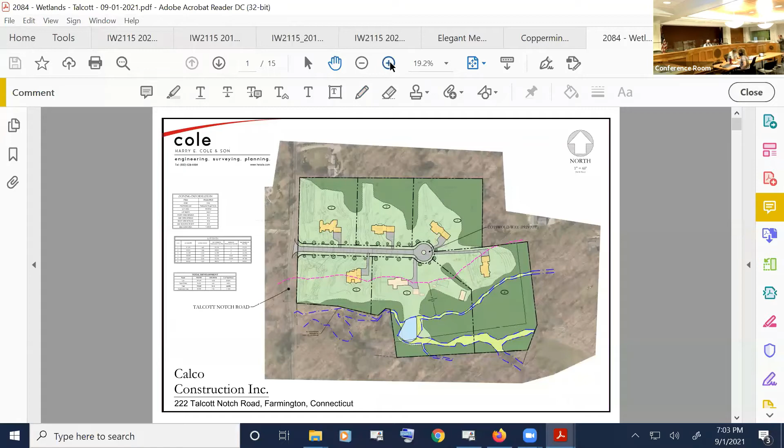Good evening, members of the commission. For the record, Brian Panico, Harry Cole and Son, 876 South Main Street in Plantsville. Here on behalf of the applicant, Calco Construction. The owner of this property at 222 Talcott Notch Road is John Sinise. He's also here. This is a residential R80 subdivision.

Total area of the parcels is 16.18 acres. It's currently one lot with a single family home. There's some outbuildings and a pool as well. Those you can see are on this presentation drawing on lot number 5, the lot in the middle on the south.

This lot is served by private well and septic system, surrounded by residential properties to the south, the east, and the north, with Talcott Notch Road to the west. The wetlands run along what the soil scientist has identified as an intermittent channel, so that's not necessarily a stream with constantly running water. It's intermittent seasonally, depending on rainfall. You can also see there on the south, behind the existing house, is a pond.

That pond was created, it's dammed. So the wetlands follow along that intermittent channel to the south of the house on lot 5, through to a larger wetland pocket after the pond, which runs off the site. There's approximately 0.76 acres of wetlands on this site and approximately 2 acres of upland review area, pretty much through the backs. You can see the upland review area on that presentation drawing, highlighted by that purple line, and the wetlands are outlined in blue with that lighter green color running inside of it.

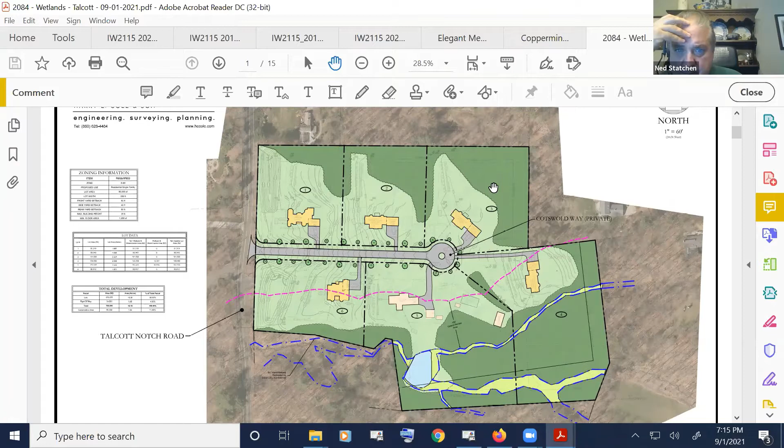Okay, and I can't quite read the plans. What are some of the other buildings that are on that property? There's a couple of sheds, a pool house type of thing, there's a small cabin, and I believe that's it.

So the building all the way to the right of the screen there, to the east, I believe that's a cabin. And then there's a garage directly off of the driveway and a couple of smaller sheds. The box that's not filled in with a color is the pool. Okay.

All right, and then I don't know if you can answer this, but on item G they talk about construction sequencing. Do we know if all these houses are going to be built at the same time, or are we going to be staggering them, build and sell, or some combination thereof?

So you plan on building the road all at once? So there'll be custom homes, they'll be built kind of on a per sale basis. The road, I would imagine, is getting roughed in all at once, in one shot, and then build all the houses. Once everything's finally built, then do the final course of pavement and stuff like that. But the houses will be built slowly.

And I know that's come up with staff comments in the past on some of these things, so as they're doing this, clear a couple lots at a time as you're ready to build, and not cut the entire site all at once. So it'll be more staged, kind of sequenced.

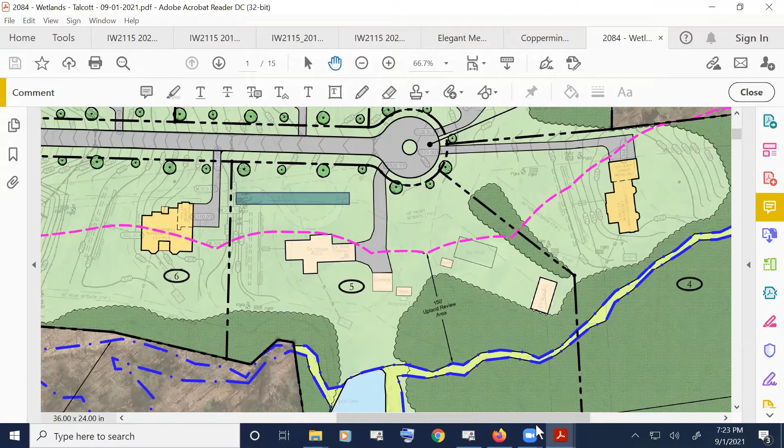I agree, and if the applicant could work with Shannon, in addition to the staking of lot 4, some other major features like the center line of the road or some of the lot corners would be helpful, but Shannon will be able to advise. Thank you. That's good. So I think we've addressed the issues that we need to deal with this evening. Okay, perfect. Thank you very much. Thank you for coming in and giving the information.

All right. We're so efficient.

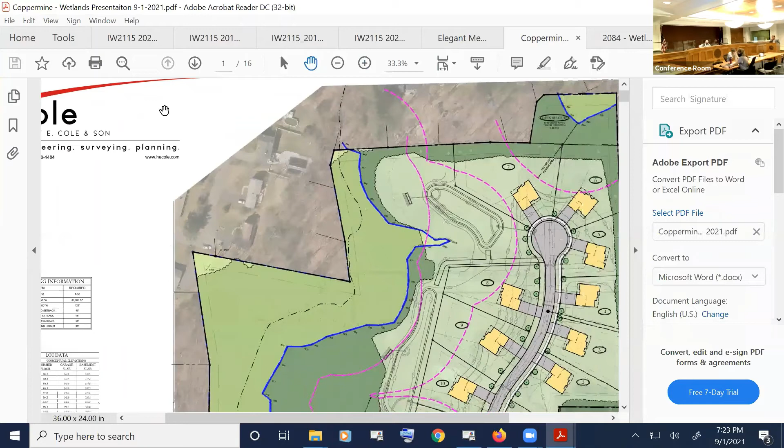So next up on the agenda is Calco, 168 Coppermine Road. Correct.

All right, so say my name for the record again. For the record, Brian Panico, Harry Cole and Son, 876 South Main Street in Plantsville. Here on behalf of the applicant, Calco Construction, Inc. The owner of this property is The Gardens LLC.

So the current property is an R30 residential. Total area of the parcel is 14.39 acres. It's one single family house. There was a barn, outbuildings, driveway off of Coppermine Road. Surrounded by residential properties to the east, west, and north. South is Coppermine Road.

Currently, the site slopes from east to west. The parcel is roughly wooded through almost half of it. The eastern half has got a large open cleared area. The western half is relatively wooded. That's the area of the wetlands.

There are approximately 4 acres of wetlands on the site, and 2.35 acres of upland review area. Just like in the previous presentation drawing, the wetlands are outlined with the darker blue line, and that green area is wetlands on the inside. The purple lines are upland review.

By splitting it into the two detention basin areas, we were also able to reduce the amount of tree clearing, so we have just a small portion through the middle of the site that's actually being cleared. This is an overlay showing the lot layout and where it's cleared versus not, from an aerial perspective. You can see where the tree line comes along on the inside, and then bumps out where that second detention basin to the north is.

That's really the only area where we're clearing trees within the upland review. Then at the end of the cul-de-sac we have 2 more lots, and we're clearing some trees on those as well. So effectively, the areas we're now using for detention aren't taking away nearly as much tree cover or canopy, which was directly one of the main concerns in the last application.

We all have reduced the wetland buffer impacts. The previous application, I believe, had almost 3 acres or so of upland review area impact. We've actually dropped that down to 2 acres. And the impacts that we have are clearing and grading, primarily grading for the detention basins, the house on lot 11, and then the rear yards on lots 8, 9, and 10.

So as you look at this map, you can see where the existing house is and where the proposed house is on that lot 11. They're virtually almost in the same place. Actually, the house we're proposing is slightly further away, so the impact there is very minimal as well.

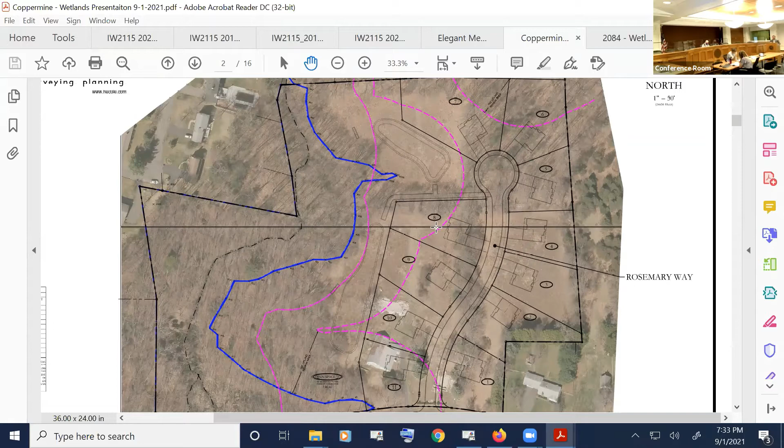So we haven't proposed any conservation easements. We are proposing that all of the wetlands and a good chunk of that upland review area is just placed into conservation as open space—so all the area that's outside of those lots. Shannon, if you want to jump back up to that other slide, it might be a little more clear there. So both of the detention basins, all of that is in open space.

Behind lots—I believe that's 6 and 7—is open space. So is this road going to be a private road, and who would be responsible for maintaining the detention ponds? This would be proposed as a public road, and either the town-owned open space or I think normally the town would maintain those. We do have a little access road and access to the open space between the two lots there and that northern detention basin, so there is easy and adequate access. Those detention basins are also very shallow and should be relatively easy to maintain for the town as well.

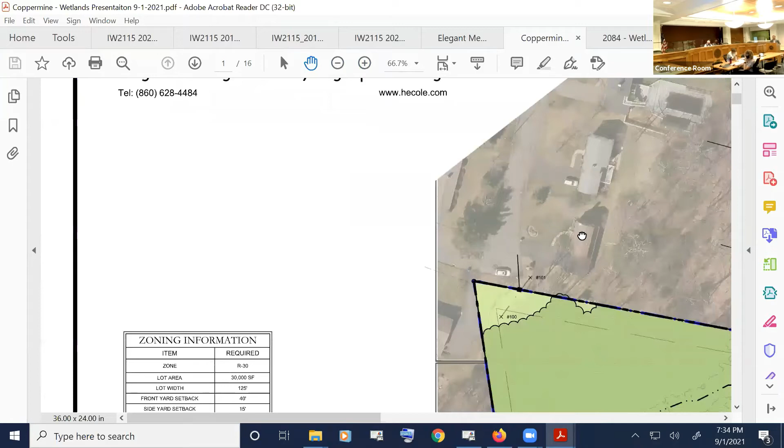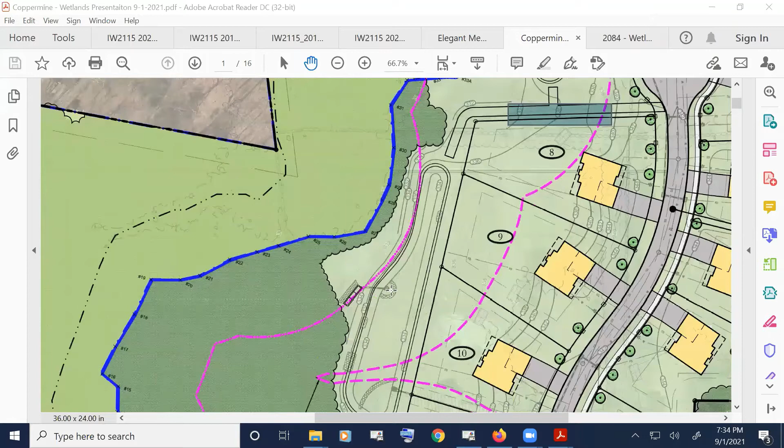Okay, so I see the northern basin has an outlet structure, a drainage outlet structure into it. Is the other basin just accepting overland flow? So both basins—oh, I see it, yes—both basins collect water from the road, from either side of the high point basically in the road. And then both basins have a discharge, which is an infiltration level spreader type of discharge structure. What that does is it's basically structures that are halfway or three-quarters of the way into the ground.

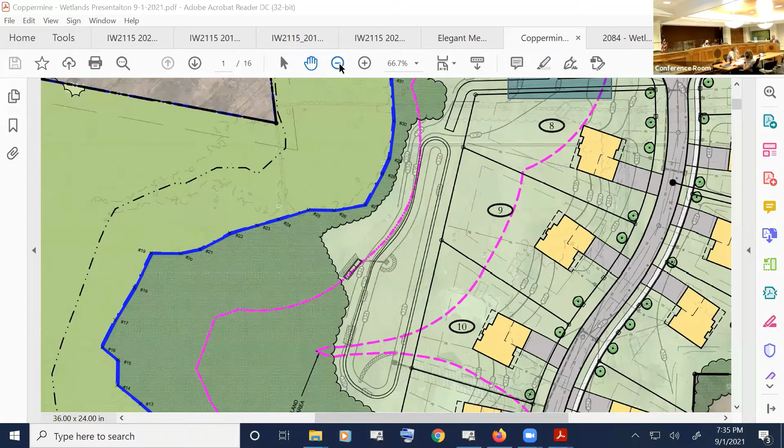Those structures take the water as it comes out of the basin, allowing them to fill up and slowly either infiltrate the water into the ground, or during large storm events, overflow out of the top orifices into riprap and spread evenly into the wetlands. Groundwater recharge was a big concern in the previous application, so these structures are an effort to better allow for infiltration and groundwater recharge. All of the roofs on every house will have infiltration chambers, providing more groundwater recharge. The fear was that adding all these buildings and foundations could slow down groundwater flow through the site and take water out of the wetland. So we wanted to make sure we're recharging and adding as much water back to that wetland as possible, while still being responsible about the amount of water allowed to flow.

Is there an easement proposed to get access to that storm drainage outlet south of the linear detention pond? On the inlet pipe, right there. How are you going to get access to that to maintain it? I believe there is an easement over that lot in the side yards of each of those two lots for maintenance and access. And the existing house, what's the disposition of that? The existing house, barns, and all the structures on the site—some are already removed and the rest will be removed.

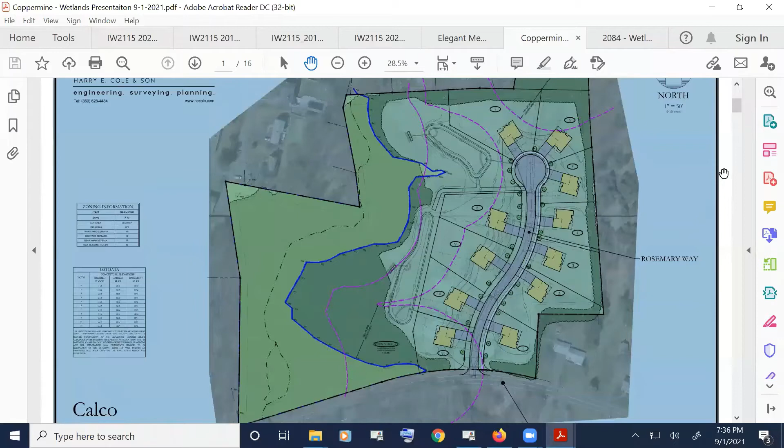Thank you, that's all I have. All right, thanks Rich. Emily? I had actually a very similar easement question, but I think you've just answered it. Thank you. Robert? No questions, thank you.

Mark? The only thing I have a question about is the detention basins. You said the southern one is going to receive the majority of the water. Where is the water going to go? Maybe define where the water is going to go into which basin.

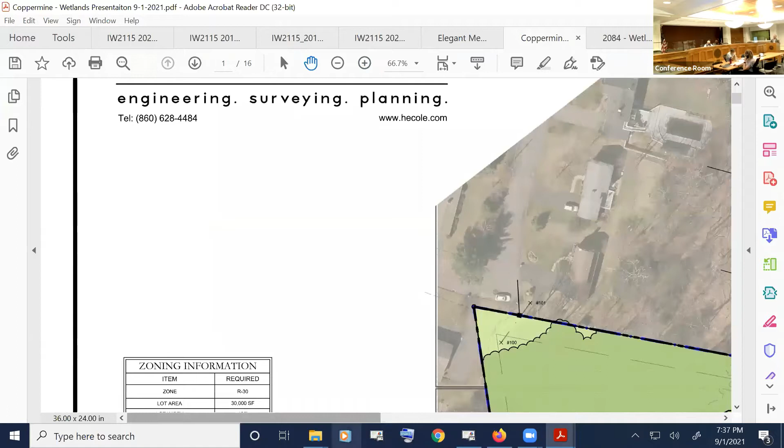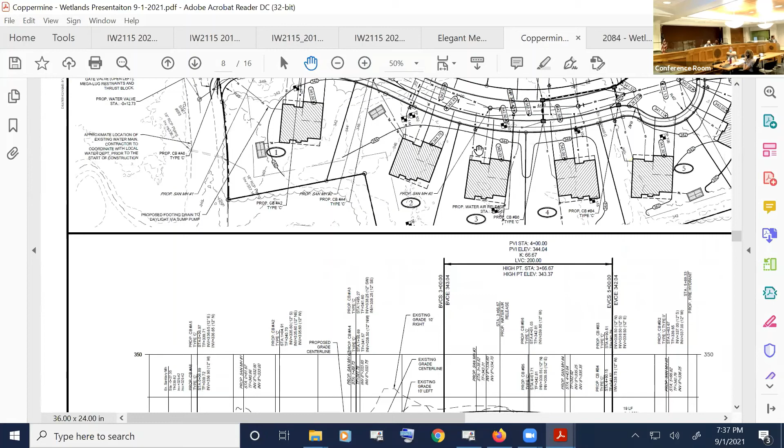If you go to the road profile sheet, scroll down—this shows and outlines better where the delineation in the road is for the high point. You can see lot 3 and lot 4 in that area, which is the delineation of where the high point of the road is. So stormwater coming into the road is basically split at that point, goes down to either the cul-de-sac or into the catch basins along the road, and from there either goes into the northern or southern basin.

Okay, I figured about two-thirds would go into the southern basin versus the northern one. Correct, and that's kind of why they're sized a little bit differently as well. Okay, thank you, that's all.

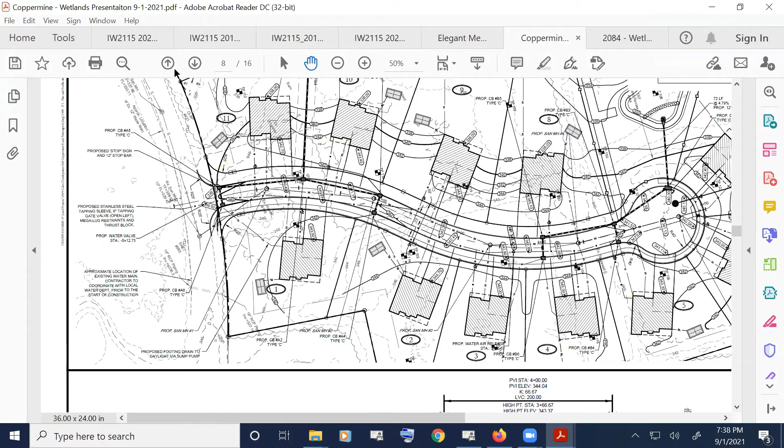Ned? Are these city or town water and sewer? Correct, so this will be on public water and public sewer.

I'm not familiar with the previous submittal. Where was it—you said you had 12 lots, you went down to 11. Was that between lots 7 and 8? Was that a lot previously? If you go down two slides there, I believe I included the previous layout. You can see how the road starts much further west, and the lots were larger on the western side, projecting more into that already treed area and upland review area.

It's much closer to the wetlands. So where we now have the detention basin to the north, they previously had a house, and our detention basin to the south is roughly where those houses are shown now. So effectively, by doing the intent of a cluster design—reducing the land area and tightening everything up to create more open space—we were able to do that and eliminate a lot of that upland disturbance.

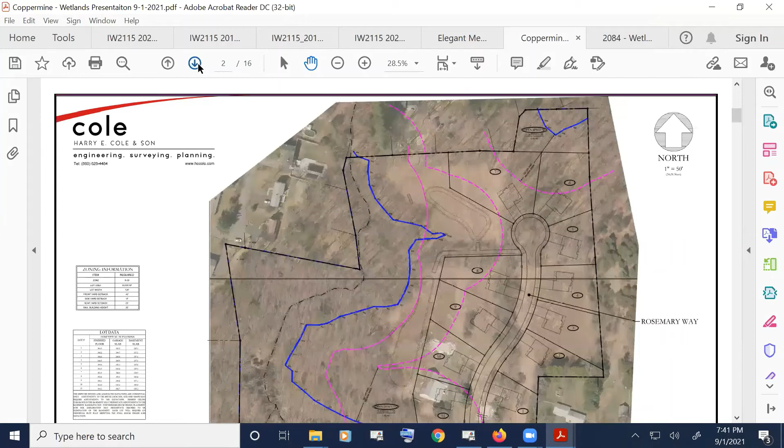That's all I have for now. Thank you. Jay? I don't know if I'm deeply committed to this notion or not. I'm just wondering if there's any thought that we need to go take a look at this. That's really my only comment.

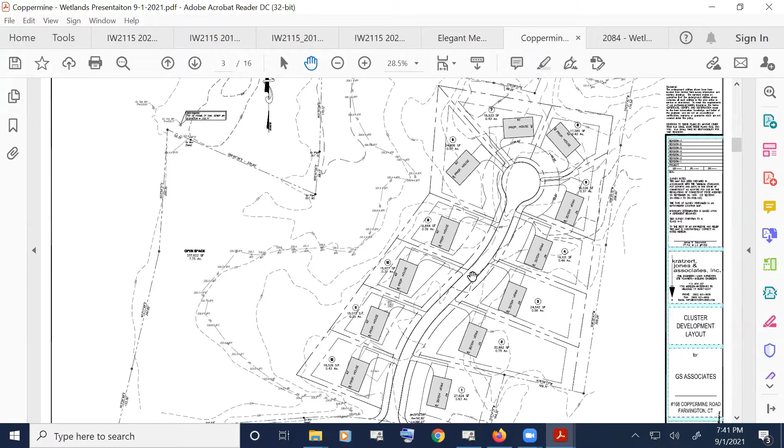Fortunately, you covered a number of the things I was writing down, so I don't really need to go over them. So in terms of the stormwater, you said that Mr. Lord will be submitting something associated with the vernal pool analysis. Correct, we spoke to him this afternoon. That was a question, Shannon, that you had on the record that we were looking for.

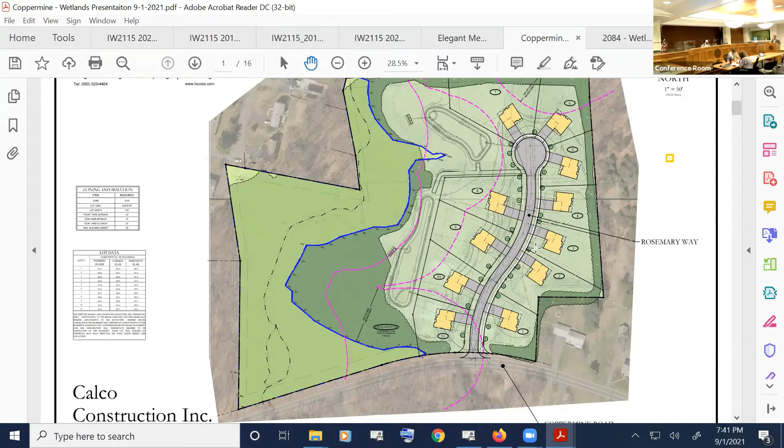I guess I'll throw this out because I don't know which way this would go, but if the town determines that it does not want the open space and maintaining the basins, what's the applicant's position on that and how would they deal with that situation?

How you doing? John Sinise, 222 Talcott Notch, Farmington.

We did a subdivision in town, Wisteria Lane, which the public road and the detention basin and wetlands, upland wetlands, is part of an association, part of a homeowners association. So yeah, we could do the same thing here, create that homeowners association for maintenance and servicing of the pond areas.

But I just want to get something like that on the record because again, I don't know what the town's position would be. But if you're saying that the goal is to have the town accept it and maintain it, and the town says no, I just want to make sure there's a backup plan to deal with something like that.

So we created two sites like this with private associations, but then you've got to govern those associations. So it's kind of complex. Really, it should be a town road, town responsibility to maintain the infrastructure.

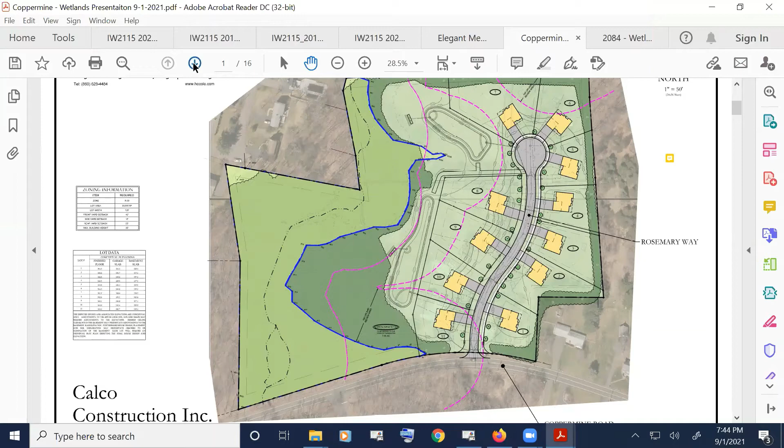You said that some of the buildings have been taken down, but some still exist. Which buildings exist? We took down the old house and some greenhouses. The barn is still in place, a pretty good sized barn.

Well, actually, I was going to raise the question that Robert usually raises, because if the house was still there, I'm just wondering if it was possible to salvage any of the house. No, it was way gone. Okay, well, that's why I was asking.

I mean, I don't really have any additional questions at this point in time, but I'd like to get a motion to accept the application. Is Mark so moved? Is there a second? Second by Robert. Those in favor, please signify by saying aye. Aye. Opposed, abstaining? Okay.

So I guess Jay raised the question, so I'll just go and ask each one individually about a site walk. Rich? Yeah, I would be in favor of the site walk. Okay, Emily? Sure thing. Robert? Yes, we should do a site walk. And Mark? Yeah, site walk.

Ned? Yes. Jay, you've already spoken, and I'll agree with that too, so probably try to do both of those on the same day, I'm assuming. Yeah, the same day. Do you care which one we do first, given one's your residence? We typically start around 8:30, so if you care as to which place we start. Residents. Okay, so 222.

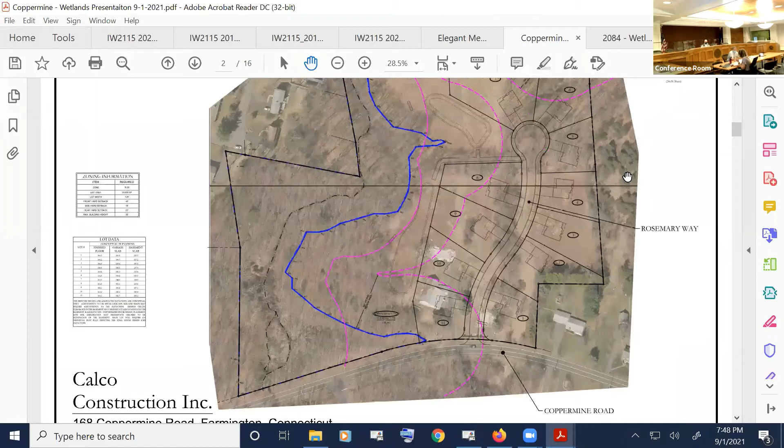How do I... talking about, you guys got a great, yeah, hang on here. Wait, he wants you to do, I don't know what he wants to do. No, you can get it. Eject right there, I didn't even know that was a thing. Yeah, I don't think I have it open. No, because I copied the stuff over. Here, well, let me close the chat thing so that's not in your way. Yeah, just pull, yeah, I think you should be fine. Thank you, okay, never done that before. I just close out of it so I don't have it open in Explorer. I copied it over, so it should be fine. All right, let me.

Okay, we are going to go to Avon. So I forwarded to all of you the request from the Avon Board of Education for their crew team, basically for a renewal and continued use of the Batterson Park pond. The ownership of the pond and that property, the Batterson Park area, is the city of Hartford. So that's why there is a lease agreement and reference to the city of Hartford within their letter and request. This is an extension of a request they already had with us. Sandy went back, and I think she said it was originally approved in 2008, and obviously they have, included in the previous approval that got us from '16 to '19.

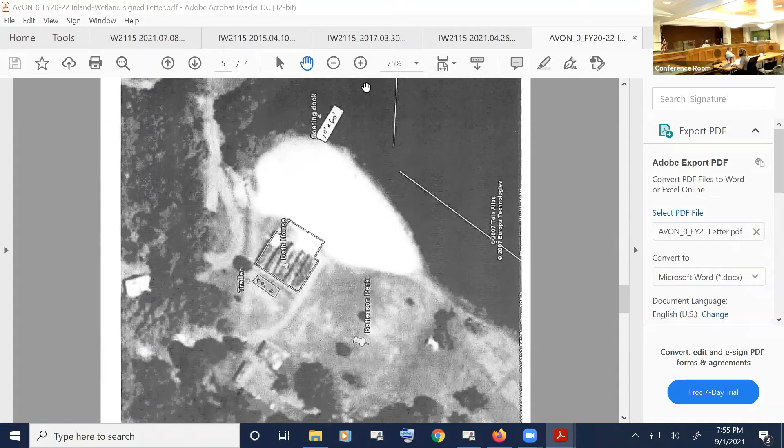Well, I mean, they had the fire at the one building, so it would stand to reason that there's certainly some work to be done there, but the timing of it - I mean, any building work would still, even though it's a city entity - there might be dredging as well, so. Okay, but if we haven't heard anything, then it's probably not something that's going to happen by the time that this would expire.

Their fall season will be done by November 1st, and then spring isn't going to start. I just wanted to bring that up because I could swear I heard something on that. I mean, okay, they'll simply have to coordinate with the city of Hartford if there's something there, but I can, as a courtesy to them, let them know that they might want to just confirm, just to see if there's any coordinated work efforts proposed out there.

But I think before they can finalize and sign, the city wants our approval, and then they'll send in the license agreement, and I'm sure at that point, if there's something going on, it's gonna hit somebody's desk. But I can make the business manager at Board of Ed aware, to at least make the inquiry, so that we try to minimize surprises.

Okay, no, thank you. So if I can get a motion to approve the extension request to, I believe it's October 31st, 2022. Is there a second? So moved by Robert.

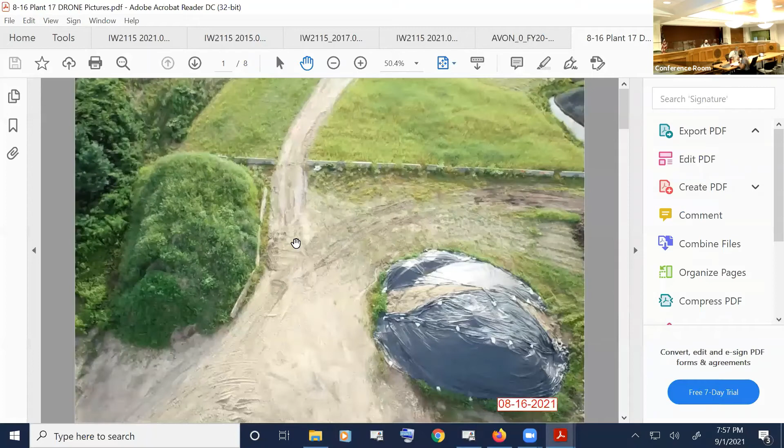And now we get to watch the movie. Yeah, there's a couple of drone flights. I'll just pick the last one, and obviously we've got rain and more rain. Well, that makes the grass greener though. It's been great from getting the vegetation in the upland area to take, which has been fabulous.

So this is really great. With respect to getting a handle on how our wetland creation area is gonna actually work, not so much. With 10 inches of rain in July, we're gonna be pushing 10 inches. I think we were at 8 inches of rain in August. Technically today's September 1st, so we'll start a new calendar. We might be starting with 5 inches of rain right out of the gate in September. So this certainly has had a non-traditional start, but it's still, you can see the greening on the sides, which is all good.

And there was the report from George, which was included for all of you. Just the brief email update that he'd been in Greece for a month and then was back and hit the site. So the restoration area is well vegetated. The slope and some of the wetland has barnyard grass, which won't last as other plants mature. They're going to do some sediment clearing, obviously with some of the rain. It helped with the germination, but we did have a little bit of sloughing of material. We've been watching that, so they're getting that hand removed.

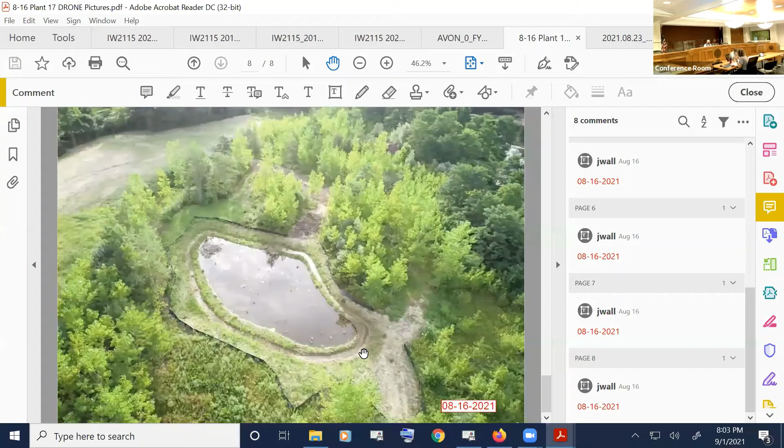Keeping in mind that this right here at the top of the photo is the access drive, so you come here and get into here. So I think we might be another season out, because they're going to need to get planting material, equipment, whatever, into here. But outside of this access road, he's asked them to seed the rest of it, so we can get that done this fall.

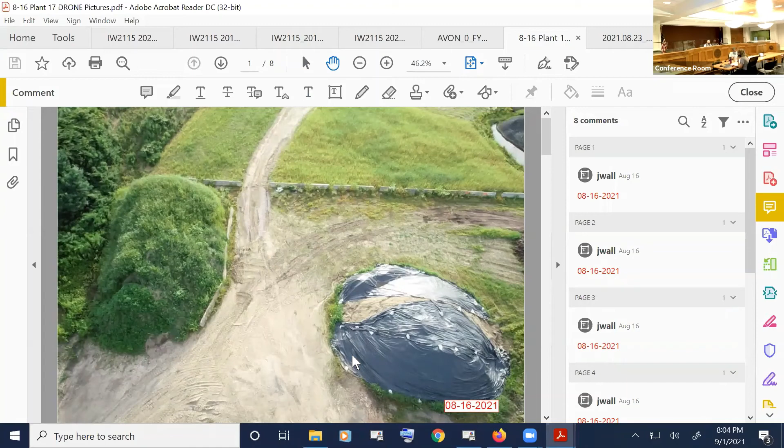And thankfully, because of the way this is graded, and you don't really pick it up in the drone photo, this is relatively flat. The pitch starts somewhere in this area, so this isn't going anywhere. Even with a heavy rain, it's not really going anywhere. If anything, it comes back out this way, and as you're ramping up, he gets some back into his own storage yard. But there isn't really any heavy erosion going on, either to the right or left of this access road.

Now, we settled on 8-to-1 slopes over here, I think. Correct. And sorry everybody, my clicker's my finger's a little twitchy apparently. So let me get this area correct.

It's here, sorry, in here is the reclamation area. I can still see the straw wattle here at the top. So right in this area is where they had filled that part of wetland A that needed to have the plantings done, and that was pushed back at the 8-to-1, correct, and then revegetated. And in a mix of all of this greenery, they've got the meadow mix, which has taken quite nicely, but there's also a variety of trees and specimens. They had, I want to say, well over 100 plants in here, and then they had plugs in the bottom of the restoration area.

Does anybody else have any questions or anything on it? No questions here.

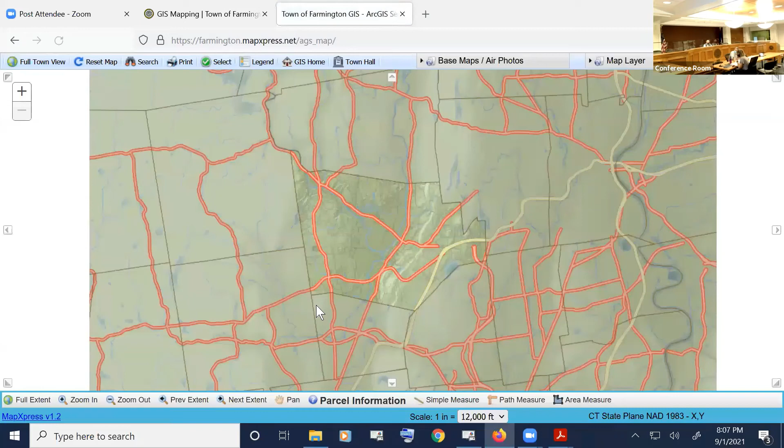The other item is our Pequabuck River. So those that are familiar with the trail down in the flats with the meadows, and behind the Culp Gardens and the farm fields, where the Pequabuck comes into the Farmington River, the confluence, just south of the confluence, the erosion from the heavy rain we had when Hurricane Fred came in.

So it was a Thursday morning and we got about 3.5 inches of rain in an hour and a half. And I know because of the rain gauge that I've got and we're tracking it. Between that and then the follow-up rain from Henri, we have a noticeable chunk of embankment missing.

So a part of the trail, you can already see part of this had started to slough off. If I go back to historical aerials, that area right there looks a little different. And we come in here and it had been eroding as it comes around. You know, anytime it's coming around a bend, it's not helpful. And then you take into the confluence and any back pressure from the Farmington River. And we know with the heavy storms and all the rain we've had, they've had to let water out of the dam, so depending upon our elevation, you're getting a push and pull with this water in this area.

And earlier this week, it came to our attention that this is sloughed off even farther and is about halfway into the walking trail that's there. So we've had to shut the walking trail down.

Obviously, we weren't able to do anything before this storm, so we're expecting to lose more material with this storm. And then as an emergency fix for this, we will be armoring this area.

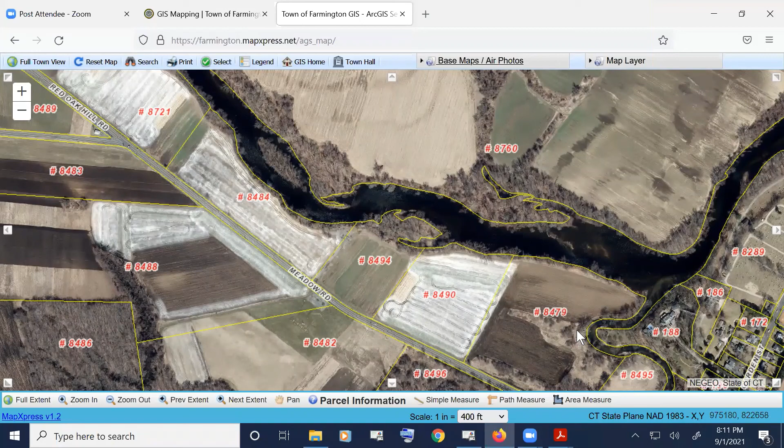Land trust property, is that this one? I don't know what property—8495 kind of. No, so to our knowledge this Stone Dust Trail is fine. It's just when you get in here. So my understanding is this trail, where the Stone Dust Trail is, is okay.

It's here, it's blocked up, another bend—yeah, so it's the outer edge. They've blocked this off. I don't think they want anyone walking in from this way, and I think they've got it blocked off, forcing people to turn around somewhere up here. So they've just blocked the whole thing off now.

The farmer's been notified because there's corn to be harvested here, so the farmer's been notified. We've tried to take all the appropriate precautions to the extent we can.

So I found it because someone chose to post it on Facebook, and I'm like, you could have just sent me an email or a text or something. But anyhow, because it had been underwater after all the rain, the guys have their usual spots they go check, but it had been underwater, got out from underwater, and somebody else saw it before we did.

That's, again, just an update that we're taking care of that. And if there's any questions as we get updates, I can certainly keep you apprised.